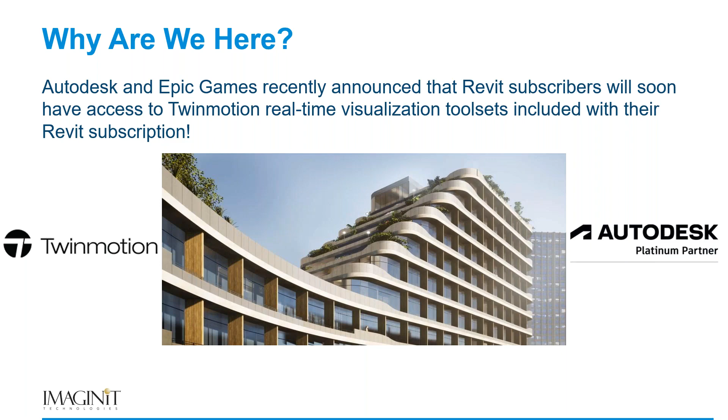So the overall presentation style of what we're looking to do here is trying to keep it along a theme. So if we're doing this as how can Twinmotion help the everyday Revit user, I might not be playing the role of an everyday Revit user, but at least a Twinmotion one. At first, when we put together some wording for the marketing release on this webcast, we called it - I was going to be the Twinmotion noob. Somewhere through the editing process it became a little bit more formalized, a novice or something else got thrown into the naming in there. But trying to take this spot of, I don't really and truly necessarily know everything that I'm talking about.

So I've got to talk to somebody else who does know what's happening and turn around to see how we can use this in some active live type scenarios.

That's me, and that's the role that Vince is going to be playing. I'm asking for your assistance, and I'm probably going to regret this to some extent, but I'm asking for your aid in what types of questions you would want to ask.

If you're like me, somebody who just doesn't know that much about Twinmotion, this is going to be coming in and becoming available to me to use daily if I wanted to. What are some things that you would want to ask the Twinmotion expert as we're talking about the way things can flow between Revit and Twinmotion?

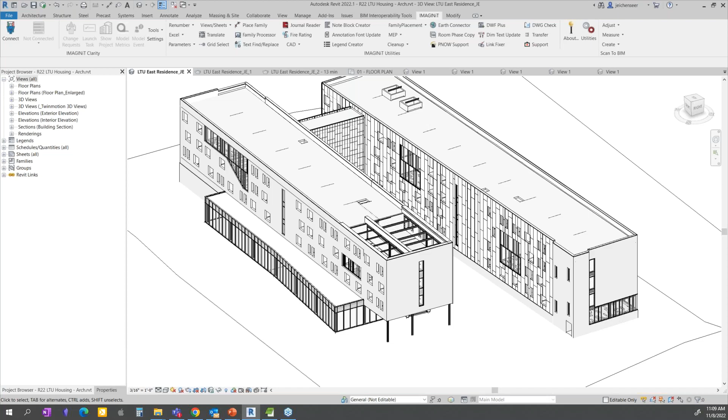And the idea with Twinmotion, it is visualization. So me as project architect or designer X, whatever role you want to try and throw it through, I want to have something that looks a little bit prettier in here. So if I wanted to do something in Revit, we can have this compare and contrast from the quick and easy of what you can do in Revit to the quick and easy of what we can do somewhere else.

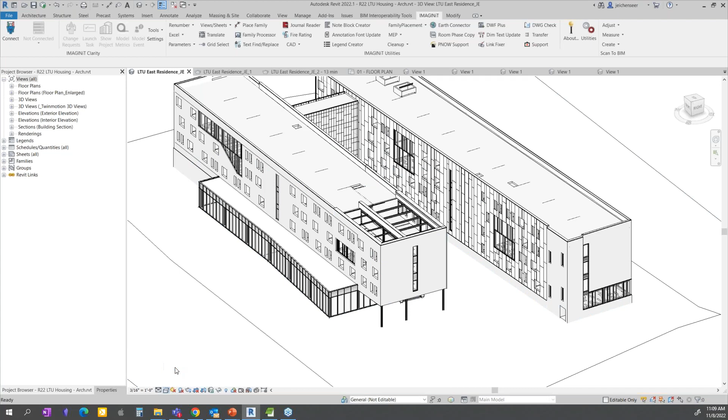I've got the building, I want to make it prettier for people to see, so I'll say, well, let's go to shaded with edges, we'll turn on some shadows, and we'll see how things perform. Now, my computer is admittedly not all that in a bag of chips. I have integrated video on my laptop, no dedicated video card whatsoever, but it does it reasonably well for some basic things in Revit.

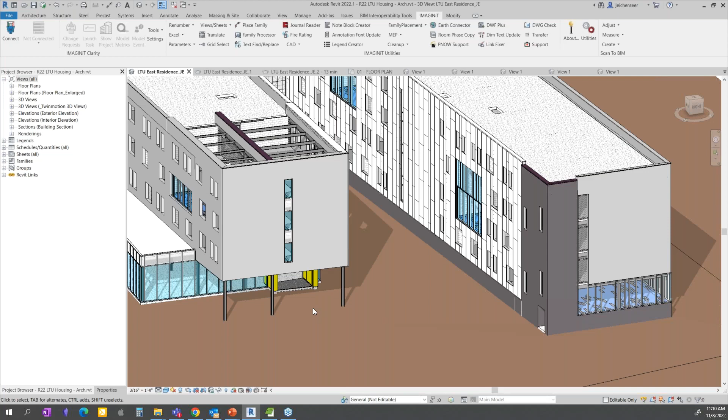If I wanted to go from here to say, well, let's go to realistic to try and get something looking a little bit better, I've got some basic topography underneath, and now I'm starting to spin. So there we go. It's very tiled sort of looking here, but I can do it, I can work with it.

If we go over to properties, Vince is probably walking down the hall trying to see what I'm doing to this project that he spent so much time working on as I'm rendering this out. Go into a perspective view eventually. So there we go, I can use my view cube if I want to get around in here. If I wanted to have an exterior shot, an interior shot, I'm starting to see some things that look okay.

Well, I hit a render button, and to save some time, because knowing I'm on an underpowered laptop, I hit the render button, just the basic sort of rendering thing that we've got down here. And I did an initial, I don't recall if it was draft or medium. It got done pretty quickly and gave me an image that looks like this. I just did a corner.

It's kind of now then I thought, well, I need something a little bit better than just this to show my customer. And so I went into the rendering mode and said, go to best. And I let it run for 13 minutes on my computer, and I got that. So flipping back and forth, it might be, with a delay on a webcast like this, there's not that much of a difference on my computer.

The light coming through and reflecting down here is a little bit different, but not that much of a difference between the draft and here. So it's okay, but I would need to spruce it up. I need to get some foliage in here.

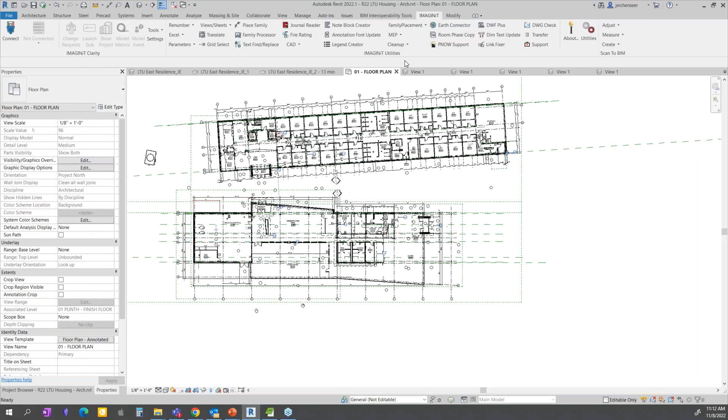One of the things I asked Vince to do is come around and look over my shoulder as I'm doing this, because I'm going to replace that. But in order to get it to look good and get some good renderings in Revit, I went out to the internet, and I do those things I'm sure a lot of people are going to cringe a little bit at again. I did a search for Revit plant family or Revit tree family, I forget exactly what I searched for.

And I found a couple things that I wanted to bring in. I had a family here that's a vase with some roses. This looks decent, they'll render out okay. It's not some leaves, but I've got some nice spirals in here. This will work out pretty well.

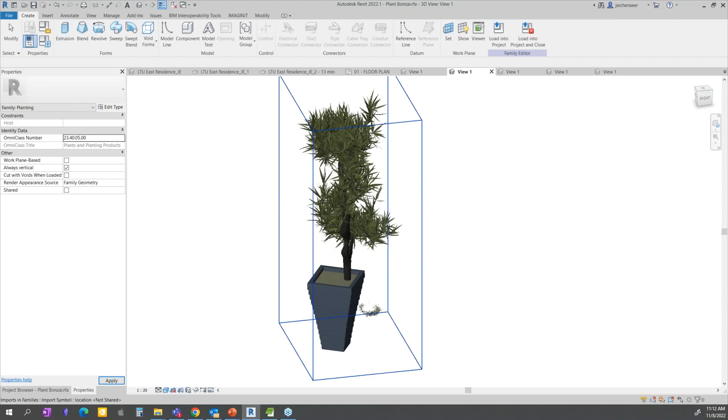I also grabbed a family for a bonsai tree, go away. And it looks like there's even some leaves that fell down here on the ground. So I was going to pull this into Revit and use this one.

So there's that family. I was going to go ahead and bring in, I've got a thing here for just a little shrubbery that I can pull in, use this for a family. It's got all sorts of good faces and things for me to look in. So that's going to be great in Revit.

I've got over here some grass with seeds and rocks built in. I'm going to just array this and copy it probably a few dozen times at least around the building to make it happen. And then I've got this family for just a tree that I can pull in, that'll be a nice level of detail for me for the tree here.

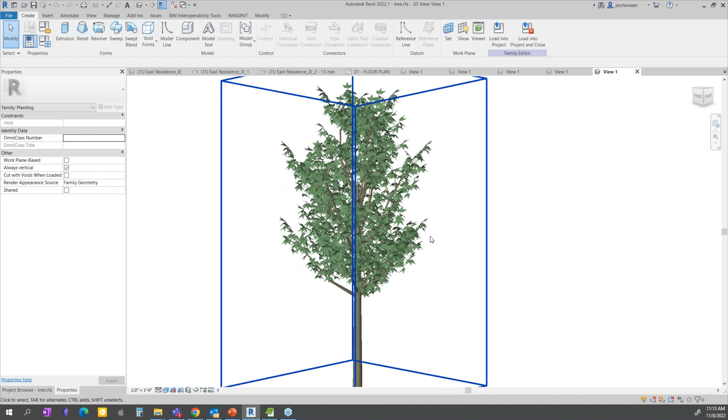And all of those families, if I'm looking at it, came out to be these files here. So as I'm going through this, Vince, before I start doing this stuff, I want to let you know what I am doing, and is this going to be okay? I know it took me like 13 minutes to do the render last time on my computer. It'll probably be closer to half an hour now to do something this much better.

That's a really bad idea, Joe, and you should probably step away from your mouse.

So for those of you who have used Revit, you know the rendering capabilities and visualization is okay. As Joe pointed out, on his integrated GPU he can do some stuff, but Revit's a great tool for doing a lot of different things, though not a great tool for creating high-end visualization quickly. It's not meant to process these really high poly count parts of geometry, like this tree, because if anyone on my team were to download this tree and put it into a project I was managing, and copy it 100 times, they would probably be fired, because that is just terrible Revit practice.

Well, I wasn't going to copy it, I was going to put it into a group for my suite.

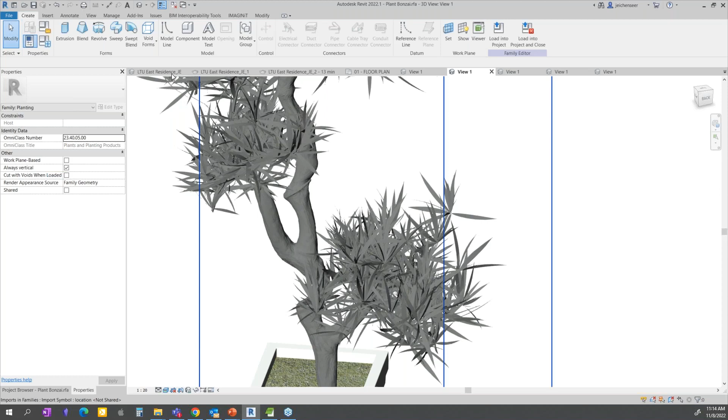In this project with the LTU residence hall, a great example of bad practice in Revit would be making a model group of one of the dorm layouts and really decking it out with maybe a plant and some detailed furniture, then copying that model group over 200 times throughout the project. Those of you who manage Revit projects know that's just a really, really bad idea. It's going to kill your Revit model for performance.

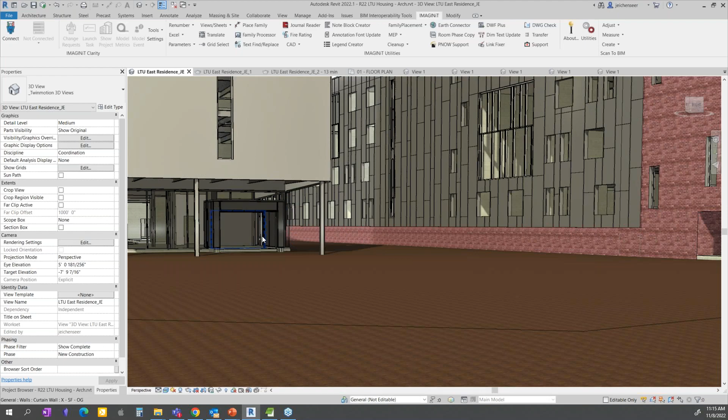When we're trying to create better visualizations and presentations within our Revit projects, ideally if you were to just use Revit, there's a lot of tricks we have to pull in to manage not only the quality of the rendering, but the geometry we'd need to put into the Revit model to make the renderings look somewhat presentable.

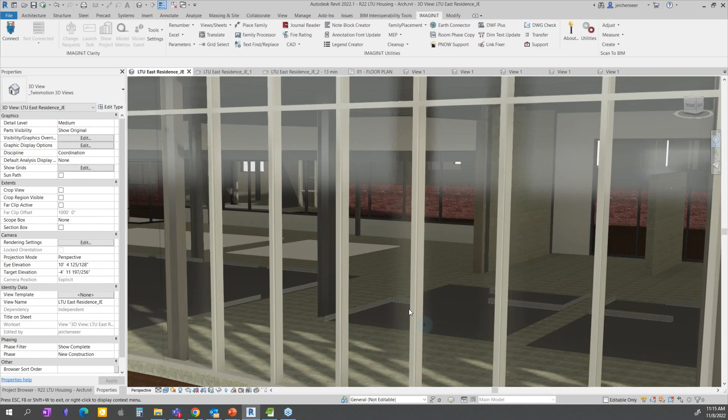So, the Revit families that you're using are probably not high detail. They don't look great in renders. The lighting, there's no environments other than the stock cloudy sky environments that you can put into Revit. The lighting control is limited. To assign IES files for artificial lighting, it's just a pain to set up visualizations using just Revit.

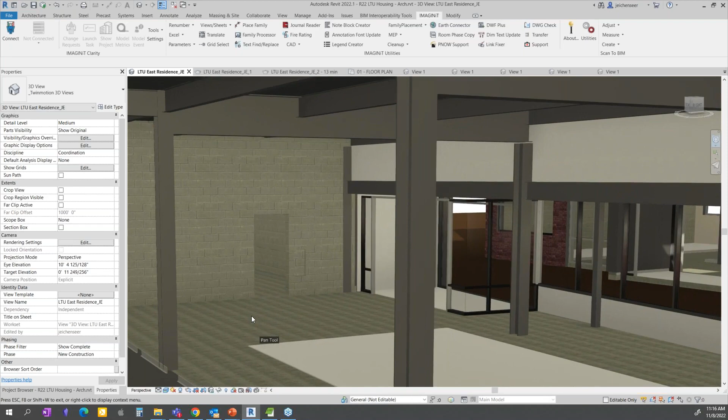So probably a number of you have explored different avenues. Some of the competitive products on the market are Enscape, Lumion. Some of you on the higher end might be using 3ds Max and V-Ray to do your renderings. All are great solutions. Twinmotion kind of fits in maybe right around that area of Lumion. I would say there are major differences between Enscape and Twinmotion and Enscape and Lumion, but really Twinmotion as a competitive product, if those of you on the call are familiar with Lumion, it's very similar in the workflows.

So yeah, if I were a designer or one of Joe's minions on this project and I saw him trying to play around with rendering directly in Revit, I would pull the mouse out of his hand and tell him that I can accomplish much, much more and make it look a lot better. And leveraging our Revit model, so the work that the entire design team has done to create these beautiful models in Revit, but let's present them. Let's take that to the next level and create some context and some really good visual environments.

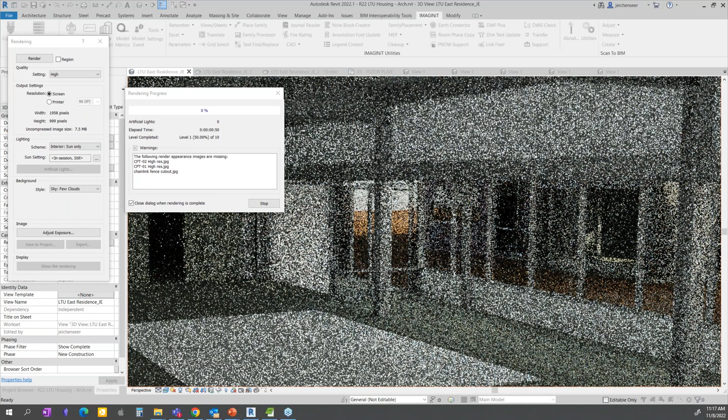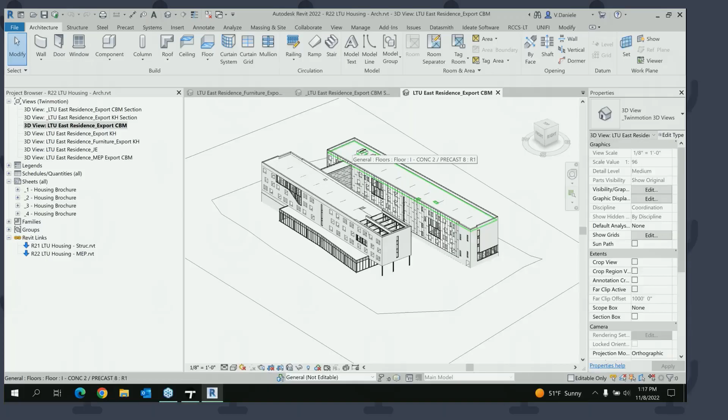Let me change you. I'm going to set you to be a presenter. Okay. And I will throw out the warning. So this is something we've run into with GoTo, and we've tested it. When I go to share Twinmotion, sometimes my GPU freaks out a little bit. I think I fixed it right before this call, but if it takes a second for me to get Twinmotion to display, I apologize for that. So let's go ahead and share, fingers crossed. Okay, are you seeing my screen? I see your screen. I see Revit. Oh, thank goodness. I was pretty nervous with over 300 people on the call that we were going to get some technical issues. I do have Twinmotion open. GPU is not freaking out, so we should be good to go.

So same project that Joe had here. At this point, let's get this thing prepared for bringing it into Twinmotion and making it pretty. So a few things I like to point out in a lot of the workflows and processes that you will be involved with in getting your models correctly, or at least in a way that they're very manageable in Twinmotion, is understanding how we want to set them up in Revit.

For any of you who have worked in older workflows for FBX files into 3ds Max or even pushing them into Lumion, you're probably aware that when we export our Revit models out to these visualization programs, basically the rule is what you see is what you get. So whatever visibility graphics in the current view that we're in, whatever is displaying, that's what we're going to be pushing out to Twinmotion. So yes, you can turn all of your Revit family categories on. You can have all of your geometry in one 3D view and create one export for that. That's great. There are better ways of managing it, which I've conveniently predefined and pre-set up for this presentation.

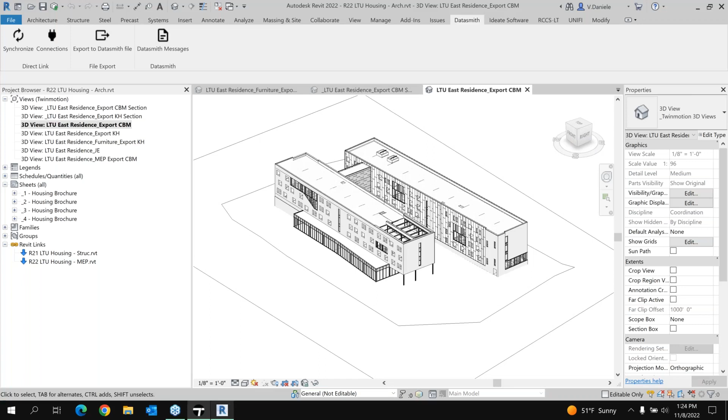The collapse by material inside of Twinmotion, what that means is once we bring these models in, any of the material assignments, so we have this really large aluminum panel wall around most of this building, so that's all one material in Revit. When using the import option in Twinmotion of this collapse by material, what that does is it groups all of those things with the same material assigned to them in Revit and creates them as one object in Twinmotion, which is great if we want to really optimize the model. It makes the models a little bit lighter and more manageable in Twinmotion.

And it also allows us to quickly replace and swap out a material. So if we take the time in Revit to make sure that, hey, we're paying attention to a material assignment, it doesn't have to be perfect in the material itself. I don't really care. This could be called material XYZ. As long as it's its own unique material, when I bring it into Twinmotion, it makes it very easy for us to manage and apply a new material to it.

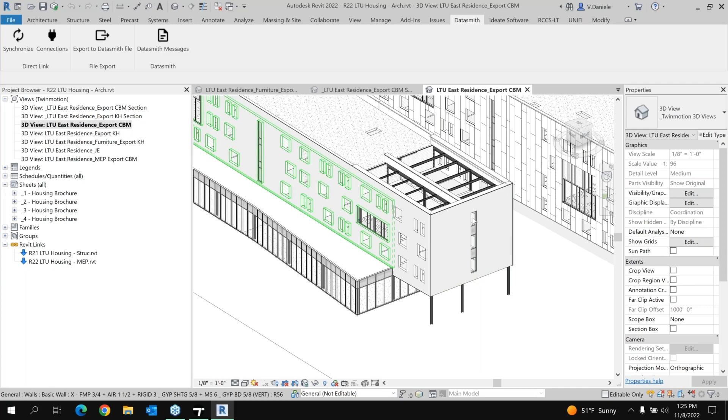So that's the combine by material method. So what I've done in this Revit model is I've essentially taken most of the core and exterior elements of this file, and just using native Revit visibility graphics, I've isolated those elements in this 3D view.

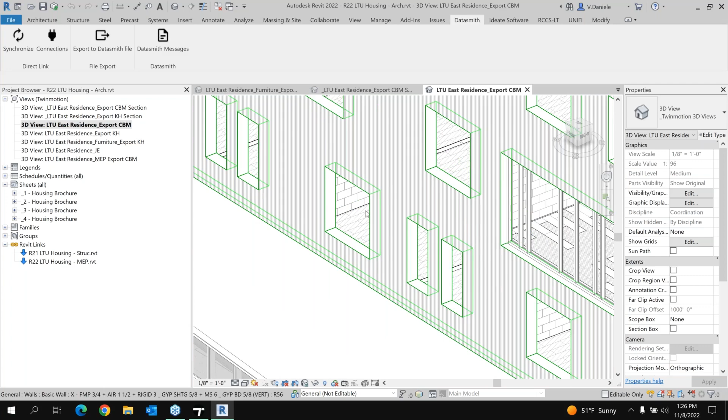So it's hard to see right now because we can't see into the building, but you'll notice things like the windows here are not visible within this, because windows have multiple components, framing, glazing, and that's kind of consistent across really all Revit family components, RFA files, so that we would want to have more control over specific elements within the family and material assignment.

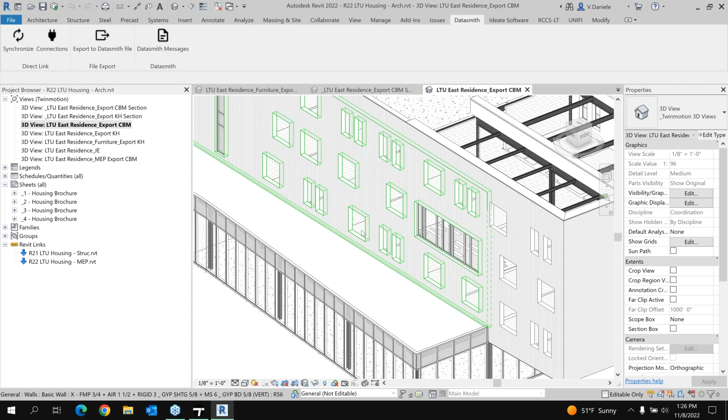So on the flip side of that, the inverse, I've created a separate view called KH, keep hierarchy, which does contain all of those objects isolated.

Now, one other quick tip for those of you that have used Twinmotion before, or just a general good thing for a workflow, you know that in Revit, when we're using demising walls or even just a normal interior partition wall type, it probably has the same material, or even if it had different, it's got gyp on both sides. And usually that's like a gray or a white material.

Well, if we wanted to have the ability in Twinmotion to go into one of these dorms and paint the walls separately or assign different materials to different walls, then we absolutely would not want to make our interior walls part of our collapse by material, because basically once we replace the gyp color on one wall, it's going to replace it globally within the entire model. Now, maybe that doesn't matter to you. Maybe they are all the same. It's up to you to choose what's the best workflow.

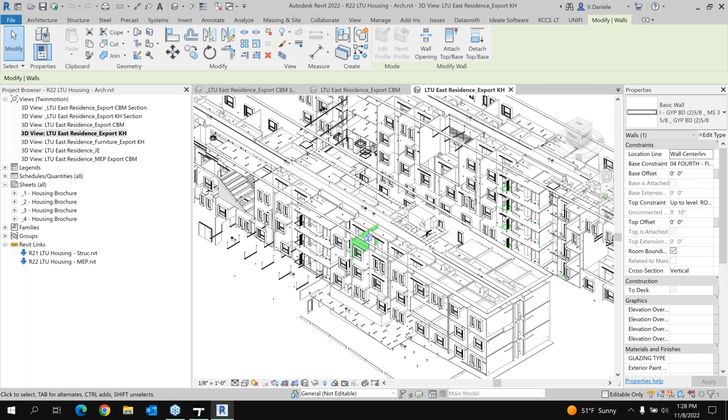So there is just some thought process that goes into this, but I made sure that I created a filter in a Revit view that isolated my interior walls, so I could, once they're in Twinmotion, assign materials separately by element to those individual objects. Whereas again, if they were part of collapse by material, I would not have that control. I'd have to assign one material to all of my interior walls. So that's just the setup here.

I think we've spent enough time. We're already half hour in, so let's get into Twinmotion. So in setting up those files, I've picked here the collapse by material file that I exported from my 3D view. Make sure I match up my setting collapse by material to that view, and then the options for bringing this in. This is something new in Twinmotion, but you can separate out.

So Twinmotion does now accept the photometric web information from your Revit light fixtures. So you do have the ability to isolate just the lights, so the light sources, or the meshes, or all. In this case, I'm going to choose all because I've got decent light sources to my light fixtures.

One thing I will point out to everyone, the light settings: if you're using the light sources from Revit, if you choose use original, it's probably going to wash out your entire Twinmotion scene. For some reason, the intensity values, the luminance values from the Revit lights are just way, way higher than they should be for the defaults. So if we use this, it's a bad idea. I like to just level set that and set the intensity to 300 lumens. It's a decent level, and then we can go in and adjust that once the model is in.

Beyond that, there is enable substitution. I'm not going to go into this because it's not for the everyday user, but enable substitution allows you to map or create a file to support mapping of your Revit materials to Twinmotion materials. So a little bit automated based on a CSV file.

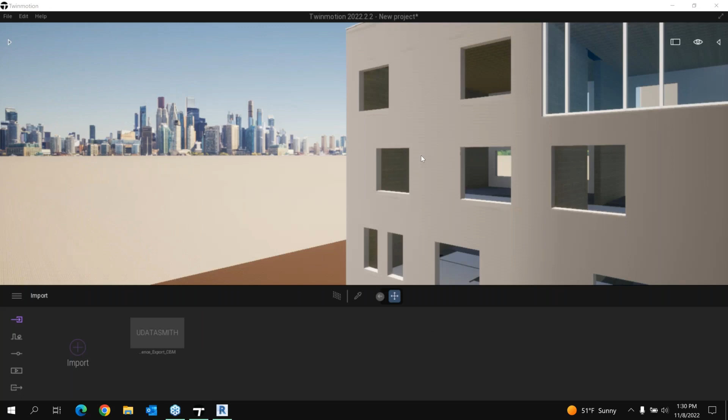Yep. I'm just going to ignore it. It's only two, and it's carpet. So if I need to, I can replace and put better carpet down anyway. So click OK. And that is the process for bringing in the import. Now, if I do bring in the keep hierarchy into this environment, that file is actually a bit heavier because of all of the different component geometry.

It doesn't take a long time to process, but I don't want us to all sit here and wait for my computer for a couple of minutes. So instead, what I've done is I've already pre-created this file and brought in both of the different exports. So combine by or collapse by material is what we're looking at here.

The second step, if I were to do this right now live, I would bring in my keep hierarchy model, which you can see. It's not huge in its own sense. The Datasmith file is about 70 meg, but every time you create a Datasmith, it also produces a folder that supports that Datasmith file. That folder has every single different mesh, so it's going to take a while. It's not going to show it because I'm in the import setting.

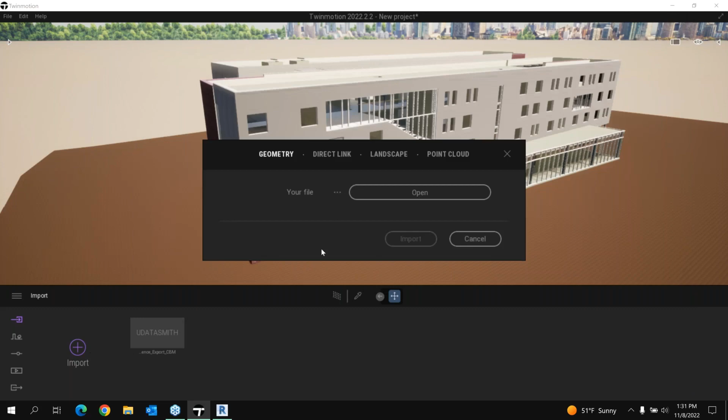But if I showed you this through Windows Explorer, there's going to be thousands of UD mesh files in there and all of the JPEGs that were tied to those objects. So that folder is a large folder, and it takes a while to process. Not a crazy amount of time, a couple of minutes, but I'm going to skip that. Probably in the time I took to explain it, I could have just let it run, but I will go ahead and open up our LTU East Residence, say no to this.

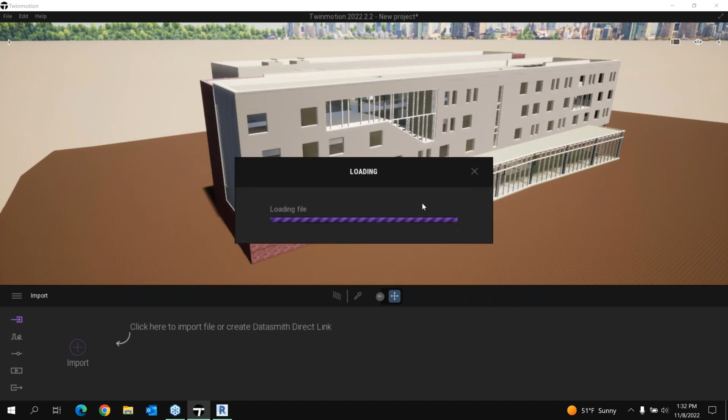Unfortunately, we didn't have a great site file that went along with this model. We did have a Civil 3D file, but we didn't set the whole thing up for this demonstration. So anyway, I did do a little bit of work here, but I wanted to sort of create an example. Oh, and I thought I saved this. That's okay. I'll show how to replace.

So this is the model. I made a mistake. I did a replace by material, and I didn't realize that these window frames had the same material as casework inside, so it replaced some material. I did fix it, but I must not have saved right before the presentation when Twinmotion crashed on me. So this is the entire combined model. You'll see the two exports there.

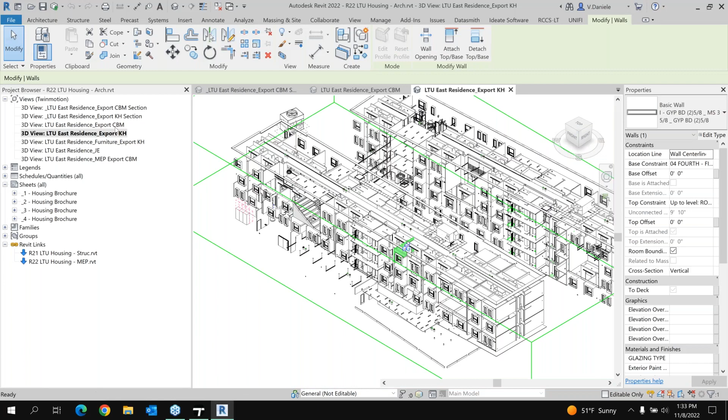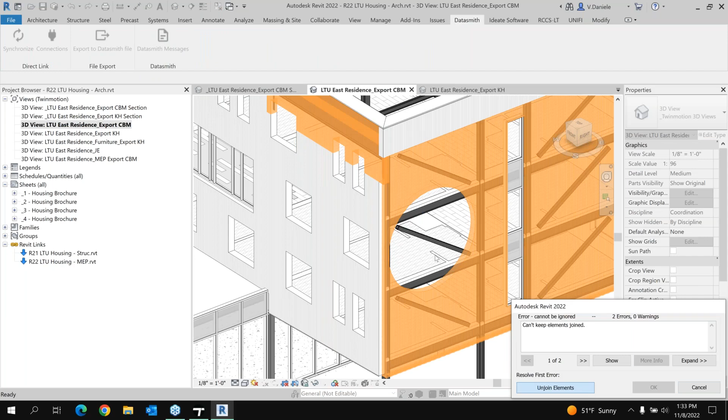One thing I do like to point out is if we make a change, usually the example I do is just grab a wall from Revit, edit the profile, and just punch a hole in it. Ooh, I got really close to overlapping there, but didn't. But if I'm in Revit and I make an update, that's okay. Unjoin those two walls.

Oh man. Joe, you're supposed to be the noob, and I'm making mistakes here. Well, see, I know how to use Revit. I don't know the Twinmotion side.

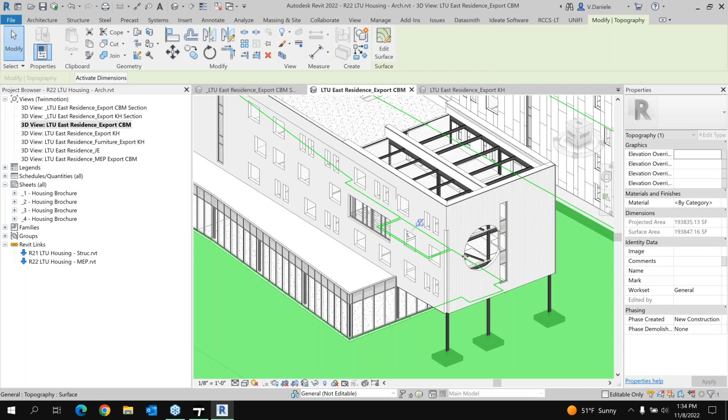So I'll cut a big hole through here. All right, that's better. If I want to reflect this change from the Revit model in Twinmotion, I would just go back to Datasmith, export, overwrite my original file. Yes. And then back in Twinmotion, all I would have to do is click on this refresh button on the import, and that's going to update.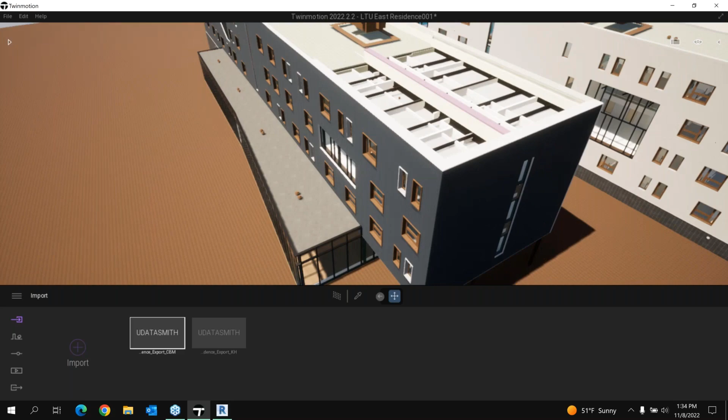Essentially, this is what the, oops, did it not finish writing it from Revit yet? I maybe went a little bit too fast, or maybe I did it on a different wall. Did I do it on that wall or this wall over here? I think it was the left one. So I maybe have to refresh just one more time. And hey, it's not showing. Leave it to a live demo for something to not work.

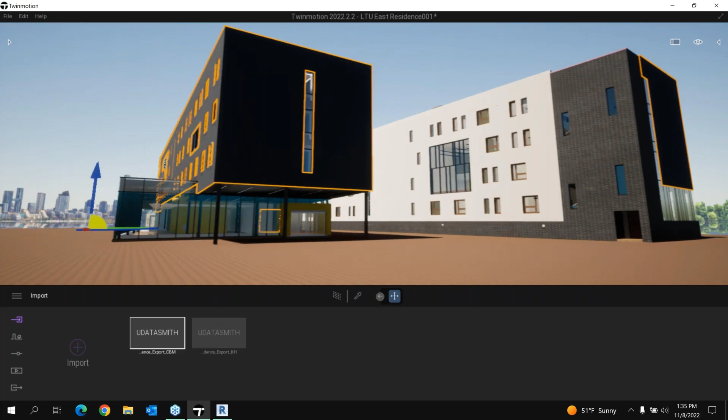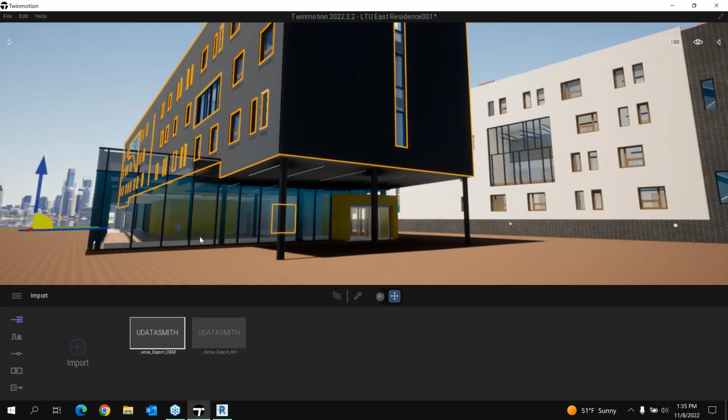But when you start manipulating surfaces or applying different components, when you hit that refresh button upon the export, so I don't know why I'm not able to bounce back into, oh, okay. So Revit is still processing that. That's why it's not updating. But if we make a change, we just re-export, go back into Twinmotion, refresh it, and then that will show our updates to our Revit file, which is essentially the same thing that the direct link is doing.

The disadvantage to using a direct link is that we are only able to direct link a single view from the Revit model. Meaning, maybe I want to make my shell and core the direct link. We could do that, and we can isolate all of the objects, but we're still going to have to create separate exports for all of the interior stuff.

So you're already managing it sort of in multiple view exchanges. So why not just use the same consistent method of exporting? And now that's done. So let's see if I try to be a man of my word here. Something I promised, I like to see it update.

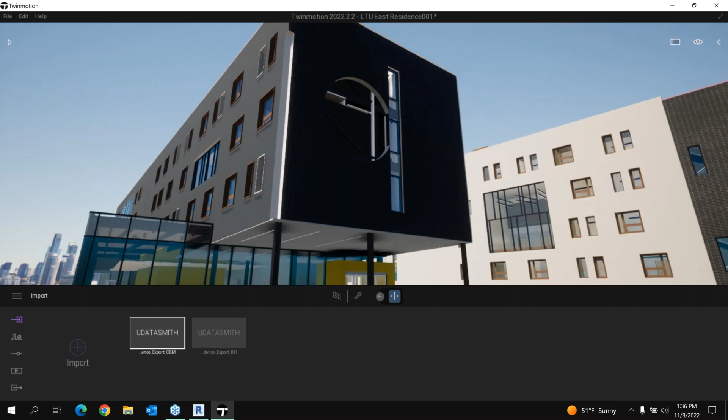So there we go. All right, so reprocess. The big issue over here is because the wall's disjoined, but you can see the cutout. The material assignment, so I kind of set this up on purpose. I made a change to that wall, but you'll notice that even when I refresh the model, my material assignment that I did in Twinmotion, I placed this nice aluminum material here, it remained intact. So it did not revert back to whatever the original Revit material was. Let me speed up a little bit.

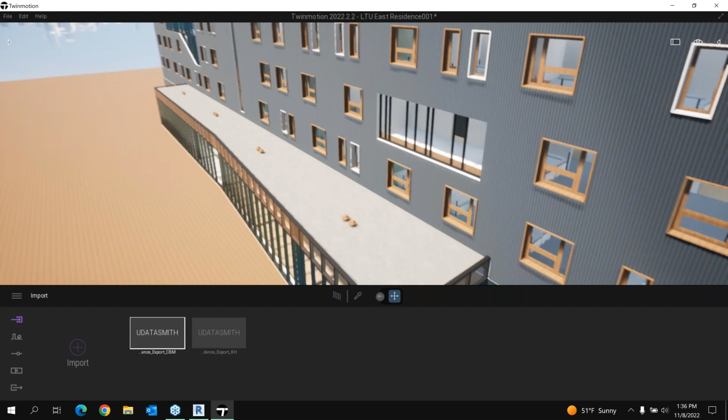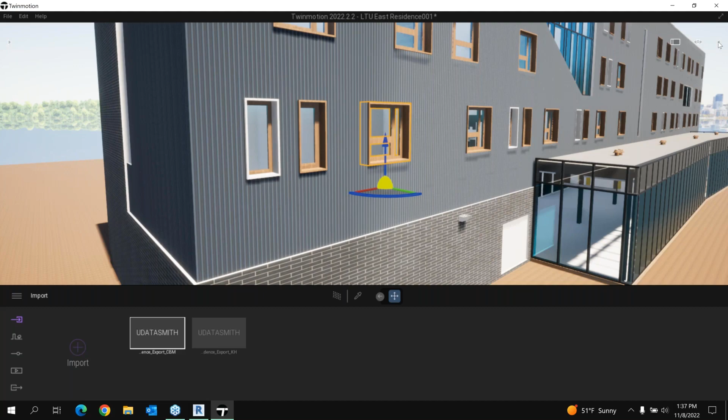That nasty red brick, I did take a little bit of time and put a nicer Twinmotion brick on the base of this, tried to match up real images, but as you can see, these materials are nicer. And while we're at it, because I made this mistake, when you bring your Revit models, or any model for that matter, into Twinmotion, the models are managed from this thing called the scene graph. In the scene graph, we have these folders that are actually called containers. And at the top level of that container is just the name of the import. So in this case, LTU East Residence Export CBM, which matches up with my Datasmith file.

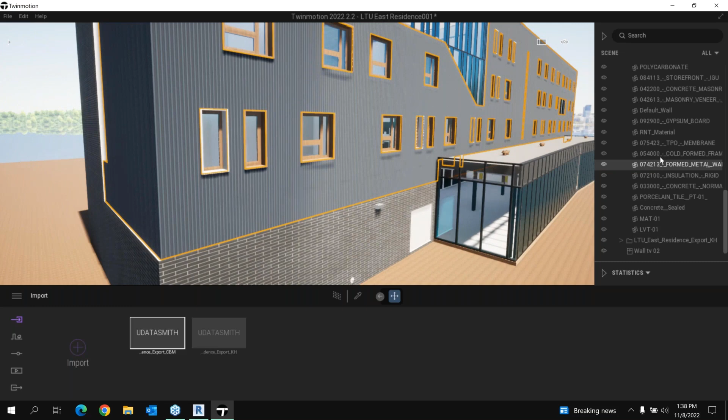Well, let's take a look real quick at the differences between collapse by material and keep hierarchy. If I expand out collapse by material, all of my elements, and if I click on anything in the viewport, it will highlight it in the scene graph. But all of those elements, even though they're part of different Revit elements or Revit families, they are all combined to be one object. So it's nice, like I said, it keeps this a little bit lighter and easier to manage, just in splitting it up by material.

If we take a look at the keep hierarchy, this is where things can get a little bit out of hand. So the keep hierarchy, Revit, when we export, the hierarchy that's created is based on the host components. So it creates sub containers for all of your hosts, mainly the big ones. There's a bunch of stairs which have some interesting hosting. But if I scroll down far enough, I will get to levels. So for Revit users, you guys know that levels are your ultimate host component in Revit, pretty much at the top of the food chain. Everything is hosted up to a level at some point.

So let's see here. So this is a good example. This is just the third level line, the hierarchy. If I expand that out, we've got all of the components that are hosted to that level. And this is the way the hierarchy is broken down. Now you'll also notice that within a wall, we have multiple doors placed within that wall or hosted in that wall. And those doors are contained underneath that level in the scene graph. So it's just something you have to be aware of.

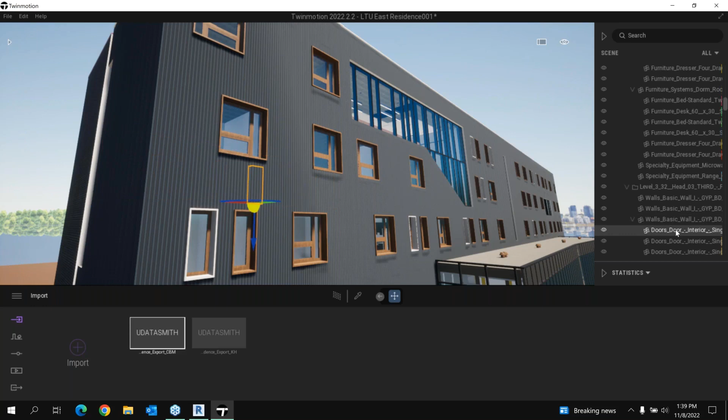If I turn off something like a wall, let's go and isolate. Let's look at this wall in particular. Hey, there we go. If I turn the wall off, it turns off all of the sublevels of that component. If I turn the doors off, we can do that. So all of your visibility within Twinmotion is managed in the scene graph. So this is sort of how you can isolate objects.

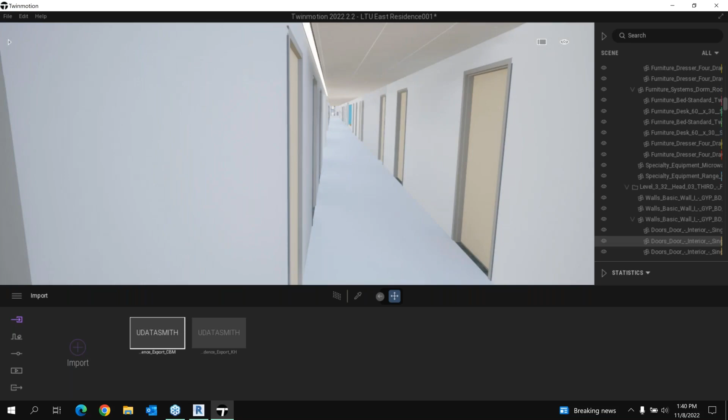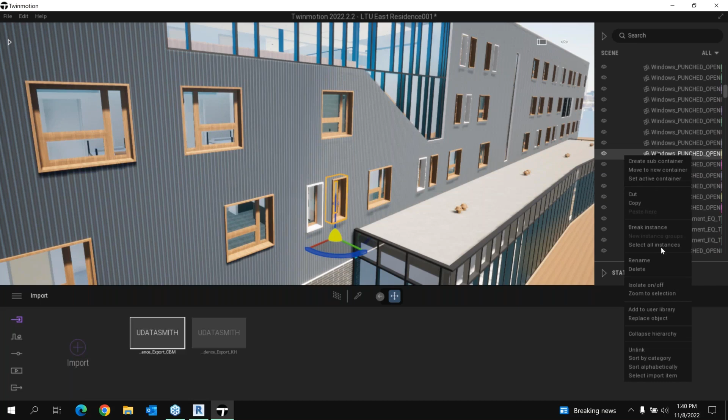If I just kind of teleport back out to the exterior, something I did earlier and didn't save, like I mentioned, was grab a window, right-clicked in the scene graph, selected the instances. So maybe that's a single instance. I know this one here. So I selected all instances of that window, right-clicked and isolated them just to show, hey, we are able to isolate elements in Twinmotion.

And now if I want to place a better type of material, something like a shiny white material, inside of Twinmotion, we have a library of components ranging from materials to vegetation, much better than the one that Joe was trying to ruin our model with. Different objects, lights, HDR environments, all of this stuff comes stock with Twinmotion, and they're always expanding these libraries with their own cloud-based elements that you can download from the different areas within the library. So there are some really good stock materials, including just our basic, let's go shiny paint material. I can drag and drop that, and that's how easy it is to assign new materials in Twinmotion.

We just take a material from our library, drag and drop. Now this material is part of the project, and we can manipulate it, change things like its color really easily, and it will update to that element within the project. Notice that it will not go back and overwrite your library element, so you always have that default material to start with.

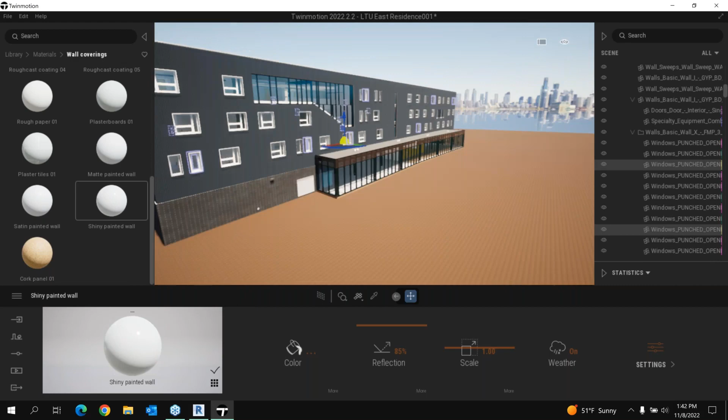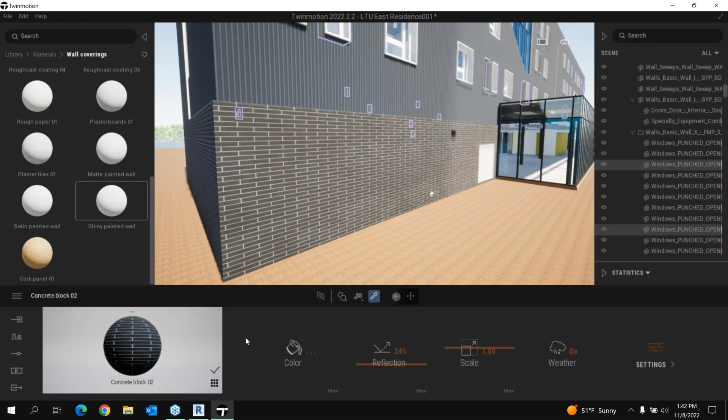The brick that you dropped in at the bottom, I need it smaller or larger, whatever. How do we change that to be a different size? Yep, so in this case, the material picker is just your little eyedrop here, click on the wall. It selects that material at the bottom, and this is called our dock in Twinmotion. It's kind of like the ribbon in Revit, how it's contextual. Based on what you've selected, if you're placing objects, if you're painting vegetation, the dock will update with whatever command sequence you're trying to perform. In this case, the material, if I pick it, it shows my material.

As Joe mentioned, maybe we want to scale this up. We could just adjust the overall uniform scale or tiling on that material with the slider. You can always enter exact values, like 4.0 is 4x to tile that up. In Twinmotion, something you want to get used to, under scale there is a 'more' button. When you go into more, this gives you additional settings for that particular item. So in this case, scale, I can rotate my tiling 45 degrees on that object.

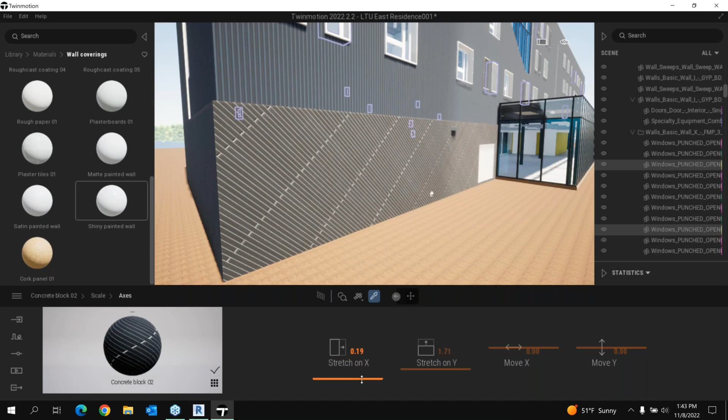Please no. Cool for the designer, not great for the bricklayer, the brick mason. So for axes, we can stretch - this is like your UV tiling. We can stretch it out in both directions to adjust it. We can slide it along the surface if we wanted to match a grout line up to the edge of a wall or something along those lines.

So I just go back and reset these back to 1, 0. Now in the dock, this is called the breadcrumb. Just to back out one step, all you have to do is go through your breadcrumb, click the previous, and it will bring you to the previous screen. It's a little bit like the ribbon and contextual tabs where you're clicking on your tabs, just a little bit different - it's creating that trail. Set my rotation back to 0, get that back to normal.

One cool thing, because of the way Twinmotion works, you might have surfaces that you want to animate.

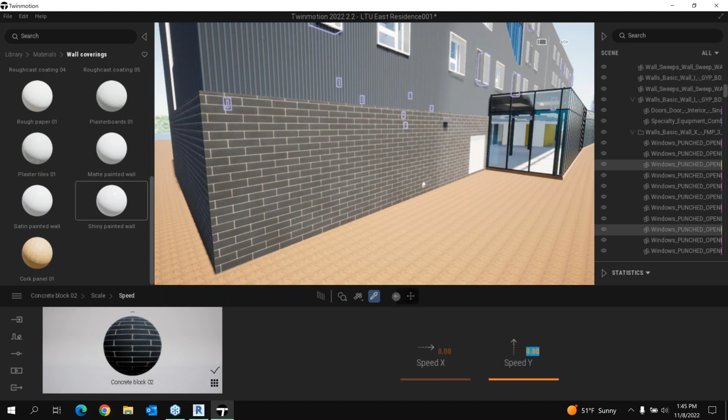Sorry Joe, you were going to say something? No, I was going to have you take me inside the building instead of have the brick move, but that's kind of interesting. Yeah, so if you do have conveyors or some type of scrolling video or something, you have the option of actually animating your materials. And when you create your live animations in Twinmotion, that all updates.

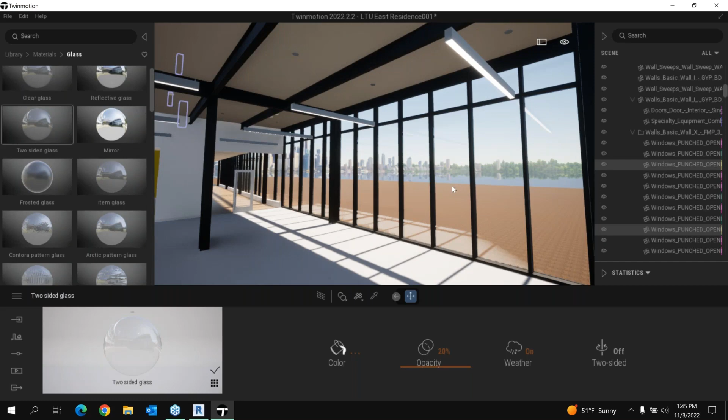One thing that drives me crazy in Revit is this glass material. So I'll go really quick into glass and just replace it. Another way to replace a material - I've just clicked my eyedropper to select this glass. If I want to replace this globally throughout the entire project, I just grab a new two-sided glass material and plop it in. A good rule of thumb here: it's good to have normals on both sides of the glass, so I always force two-sided on my glass, which will make it render like a dual pane glass instead of a very thin geometry surface.

So, sorry not to get too busy on everyone here, but yeah.

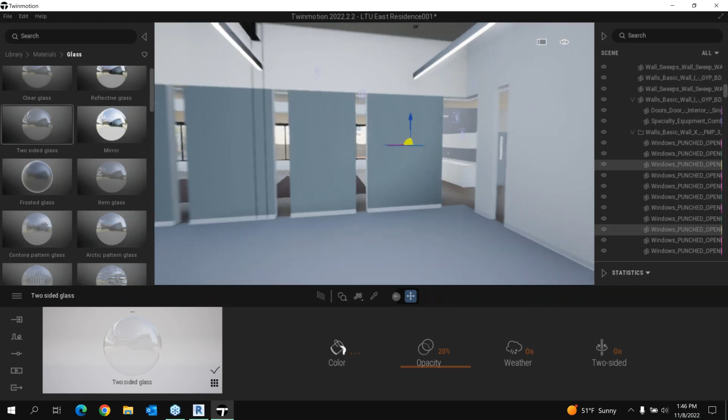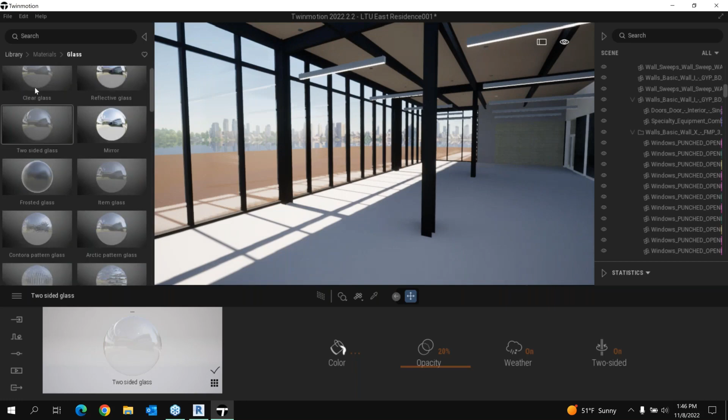All right Joe, what do we want to do inside here? This room on the other side, I know that was going to be a workout room. So you'd mentioned a library of stuff that we can pull in - what types of things can we drop in, like some exercise equipment, treadmills? Cool, all right, so if we go into objects, home, we've got some really good content, and good luck modeling this type of stuff in Revit to the quality that we have it here.

So there's a whole bunch of really cool gym assets. Fortunately, we obviously did this on purpose - this is a fitness area, but we've got some really detailed geometry. And if I scroll down and grab a treadmill and drop it in here, let's just kind of line it up.

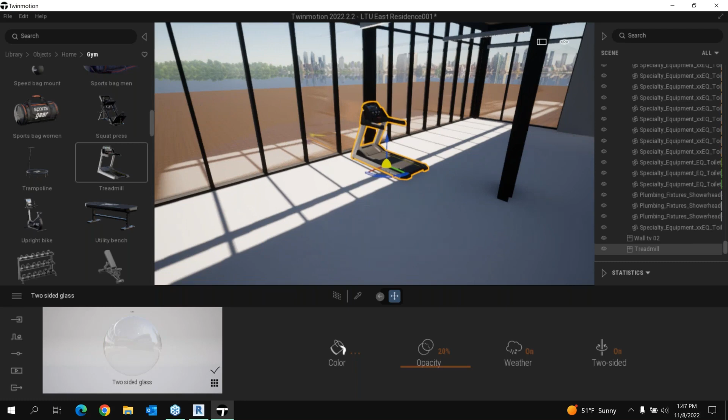One thing I'd like to point out is Twinmotion is not meant to actually be doing your design modeling, but I like to say it's built for creating the context. In this case, we could have a proxy object or placeholder in Revit for a treadmill, but there's no way your treadmill in Revit will ever look this detailed. So we want to replace it with a better object. We'll show a method for that with some furniture in a second.

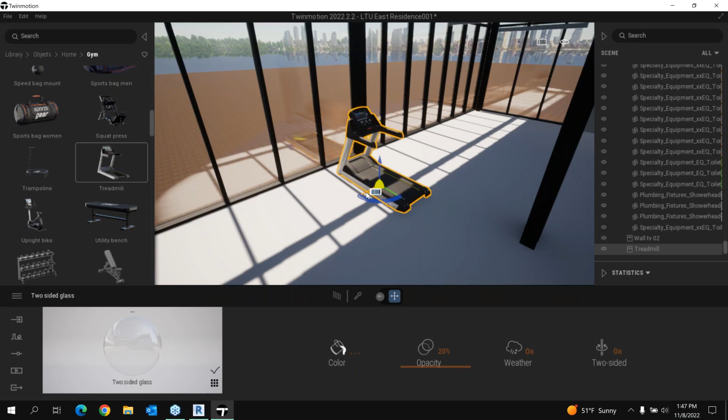But for the treadmill, one cool thing Twinmotion allows us to do, I'm just holding my shift key down, dragging the treadmill over, and I can create an instance array. Let's say we've got 6 treadmills, set the spacing to something like 4.5 feet. And I've just created an array of treadmills.

Now maybe we want to add some more gym equipment. We've got some pretty cool stuff in here that we can choose from. A lot of it's stock, loaded with Twinmotion, and some of it you have to download. Anytime you see this little download button in the corner, that just means the content is available for download. It's not chewing up space on your computer until you download it.

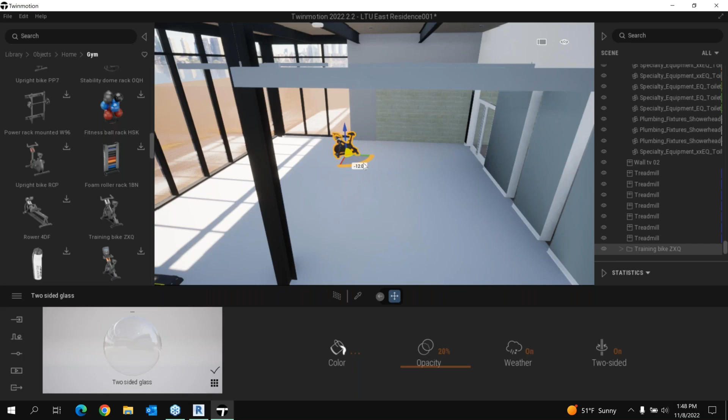This is an area where they're constantly updating the assets in Twinmotion. I know one big complaint people have is about some of the stock vegetation in Twinmotion. It's good, there's good trees and stuff, but it's not extensive, especially based on region. I will point out that in the upcoming release of Twinmotion, they are going to have more regional-based vegetation libraries available—not just tropical or African, Asian trees, but North American trees and a lot more vegetation assets.

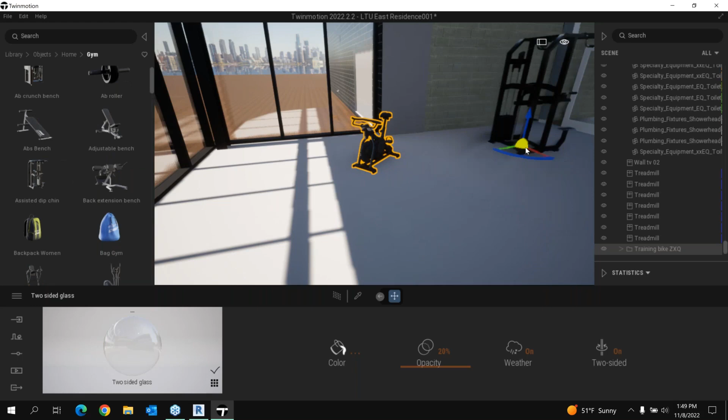So anyway, just going through, we can start to build this out. I don't want to spend too much time, but you can see there's some really nice detail. So what about if we wanted to say, okay, this is great, it's daytime, take me to night and throw some interior lights? Sure.

Let's go ahead and just shift our time of day to be nighttime. Right now I'm not using an HDRI environment, so we're getting what we call the dynamic sky. When you go to nighttime, you get nice little starlights here. Our artificial light is kind of the only thing lighting up the space, and it is very dark.

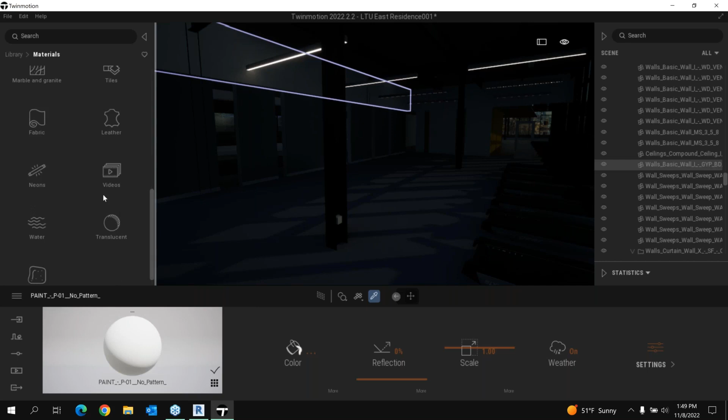These materials came in from Revit as illuminated materials. I can replace them with better neon materials, probably like a daylight—let's get right there. And control the actual glow option from that light. Now I thought, let's just verify here.

I probably only brought in one of my samples—I had the light sources come in from Revit. I must have imported this one without the lights, but that's okay, because in Twinmotion I can grab these different light sources and create light distribution from an object.

So you have your native controls—intensity that you can adjust for a light and see that effect in real time. Attenuation will allow you to control the distance of that light and how far it's going from the source, as well as your angle, so you can start to control your light distribution and see the impact of it. Now this scene, we've got a really bright light, still not washing the space well. We can change the color temperature and all of that. Turn our shadows on, which we definitely want to do for artificial lights.

But why is the space not looking like it's lit up? Well, it's probably just because we don't have quite enough light coming in here yet. Let's change our intensity back down, dim that out, make it a little bit softer. But there are settings that we can see.

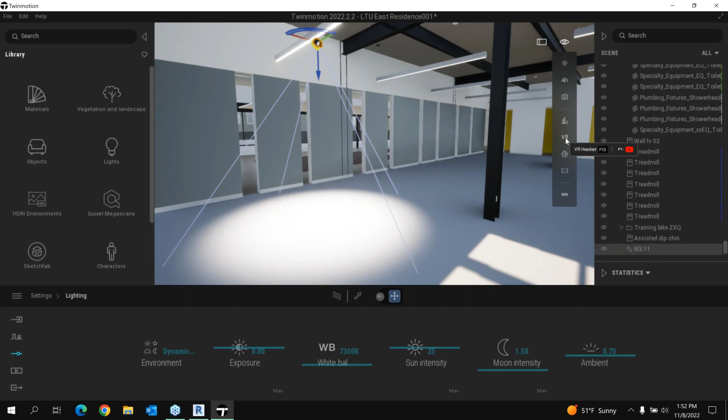And as long as you have a computer that's suitable for VR, so something with a good GPU in it, and probably a good amount of RAM. Then also something you want to pay attention to when going to VR is your frame rate. Twinmotion constantly displays our frames per second.

33 is good for navigating around on my screen and maybe walking a client through a project, but it is not ideal for VR. So one thing you have to be aware of when going to VR is you'll probably want to optimize some of your geometry, or at least condense your models down in different ways. Maybe I do my whole export from Revit combined by material to make it easier to process, with fewer materials and less geometry it has to generate. That will increase your frame rates.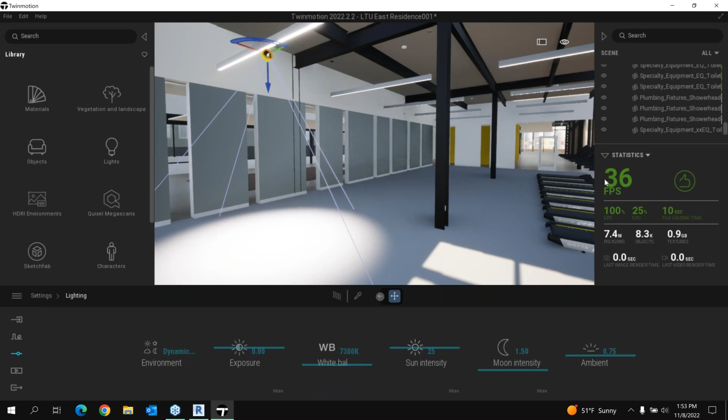However, inside of Twinmotion, there are preferences for VR, and we can automatically set a threshold in frames per second. So when we activate this threshold, or if our headset has its own threshold of 90 frames per second, or maybe a little lower like 72, by checking this checkbox it automatically determines your headset's frame rate preference, and it will automatically degrade your geometry in order to run at that frame rate. So you might not get as great quality of lighting and shadows in the VR experience, but you're not going to get sick from running at a low frame rate.

Or we can manually just set that, say, let's set our activation threshold for VR to 72, that's actually a good one. 90 is even better. So if we set that to 90, when we plug our headset in, it's going to adjust the shadows, probably make them a little bit grainier. Maybe your geometry and stuff will not have the same type of quality or texture to it, but again, it will be able to process appropriately in the headset that you're wearing.

If I set my desktop settings down lower, this might give you an example of what we would see, maybe not medium, but high quality. This frame rate jumped about 10 frames per second, so nothing significant, but this is definitely something you have to be aware of when pushing it over to VR. So all you have to do is plug your headset in, click the VR button, and you're ready to go.

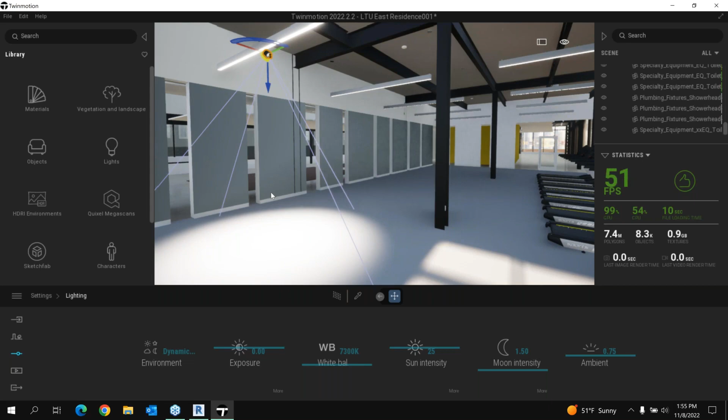Okay, what about people that don't have VR then? If I need to get this out to somebody else who wants to look around that does not have a headset, or one good enough, does not work well with Google Cardboard is what I'm hearing. Yeah, we actually had a customer last week that said there's no way we're gonna get our contractors and clients to throw a headset on in a conference room for walkthroughs. We just need something that we can share with them, that maybe we can guide them, taking control of the mouse and walking them through the project.

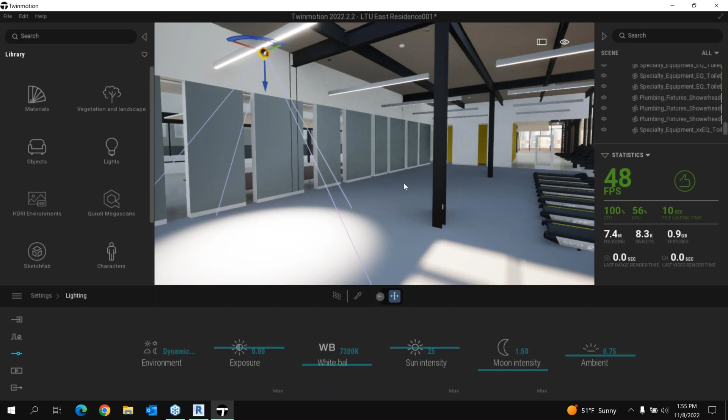So there are a couple of options. You could always present Twinmotion from your machine or computer in full screen mode, and all you're doing to navigate around is using the WASD keys on the keyboard. I hate saying this because it has a negative connotation for some reason, but it's just like a video game. You're just walking through a level to navigate through the project and look at the design.

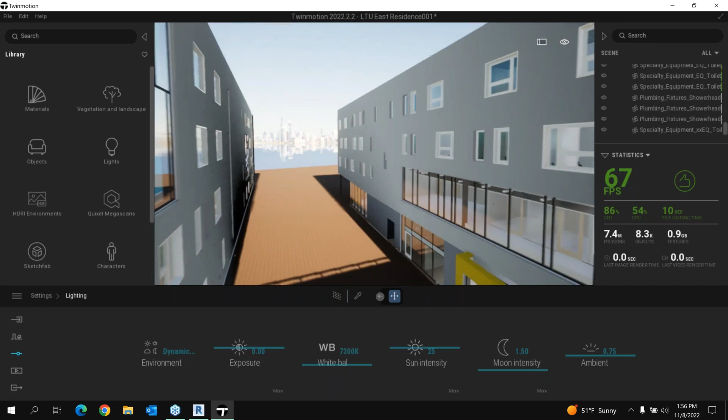The other option, we can do fly-throughs, so it's just a quick change from pedestrian to fly mode. And instead of walking into the walls, now we can fly. I'm probably making everyone sick on the webinar, but you can fly right through the building. So you can do your fly-throughs. The other formats are for exporting or presentation.

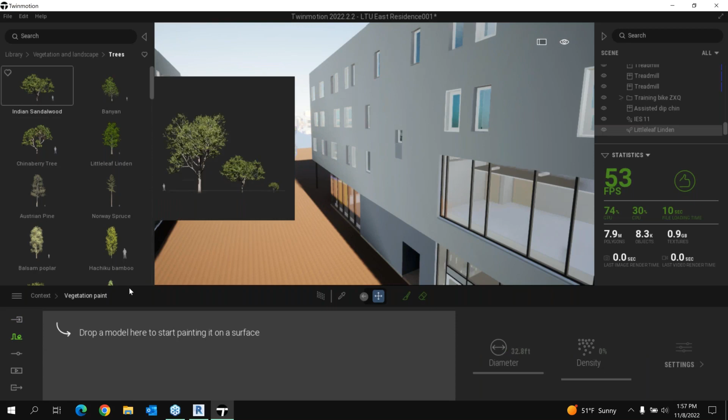So I haven't taken the time to create nice vegetation and stuff, which just really quick, I'll drop a tree in here. That's a lot better than yours, Joe. Scale that down, maybe paint some vegetation. This is one of the things I love doing in Twinmotion, it's just so much fun. We can grab a palette of vegetation with grasses and weeds and all different types of really cool stuff.

Let's get out of here.

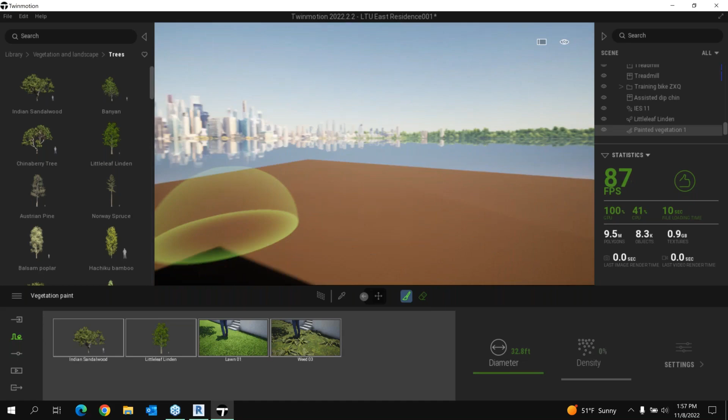Let's go out into the open here, and we can start to paint this vegetation along the surface. Now, I will want to switch back to ultra high quality in order for this to display. But as we get into this, we can make, hey, we really need some weed block or something down here because we've got way too many weeds.

Bump up my lawn, and once this catches up, and I'm always afraid to do this during the webinar, but you'll start to see these different, we're freezing. Well, we've got like 1 or 2 minutes left, so okay. Don't have much to do with this.

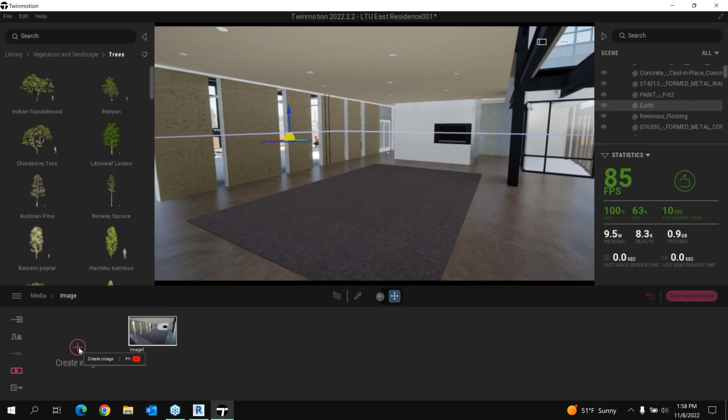So it might have to go through a verbal description rather than showing us some of the different options we'll have. So for output, when you are in a space to create an image output, you just click the plus sign to create an image, and it will create a camera. This is basically like creating a bookmark within the Twinmotion project. Once these bookmarks are created, you can adjust the image settings for all of these, so you can really tweak lighting, render settings, materials, filters, all different types of saturation, contrast, you name it. You can adjust your images, and it's stored in the image itself.

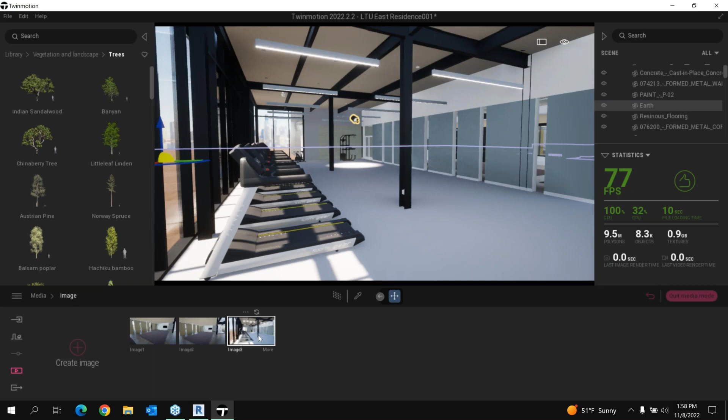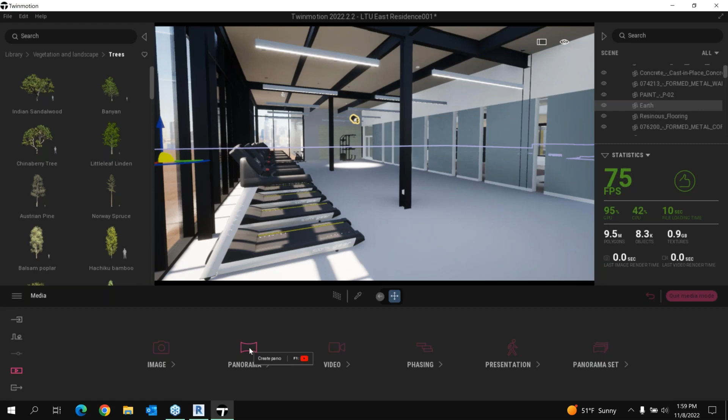Then once you have the image created, to actually process it to a PNG, you would just export, pick the image, and say export. So you can control resolution and all that good stuff. Other output, we can create 360-degree panoramas. So again, those are viewable in headsets, or if you have like an online 360 viewer, YouTube, Facebook, have them embedded.

We can process or create videos really easily. So if we want to do a walkthrough, maybe start at this point, create this frame, move through the space, create a second frame, control the duration of that. The keyframing is quite simple in Twinmotion, but created 2 frames over 10 seconds. This is the sort of transition and movement that we get. We can jump completely to a different area. Oh, maybe not that area, but a different area of the project.

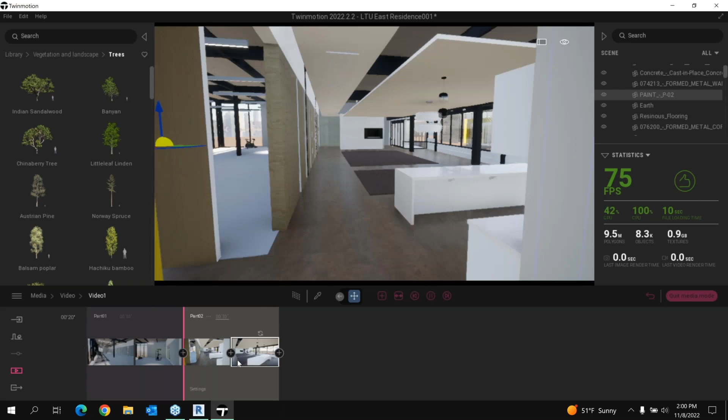Okay, here, create a new part to that video sequence. And maybe you just want to kind of move in slightly and then just do a little pan. This is going to be really slow over 10 seconds, but you can start to sequence your videos. It's kind of like a compositing program, very basic, but this is the sort of stuff that you can do. And then you can export your videos either directly to an MP4, which I don't ever recommend.

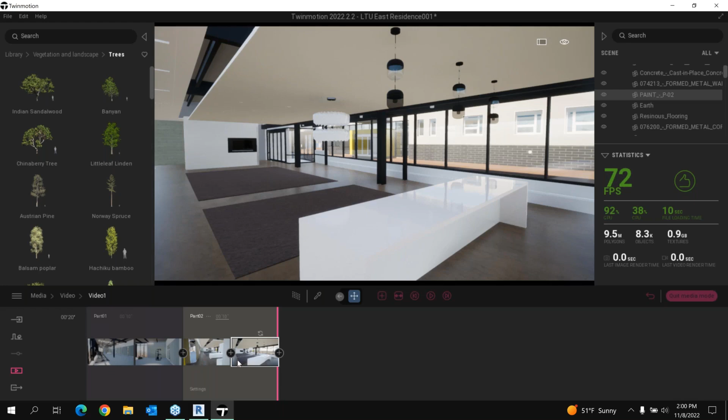If you're going to make a high quality video, you want to export it out frame by frame and put it into post-compositing software. But Twinmotion does allow you to go into video, pick your video, and then control things like the format. So PNG is going to go frame by frame, which means we need to control our frame rate, and we can export all the way up to 120 frames per second.